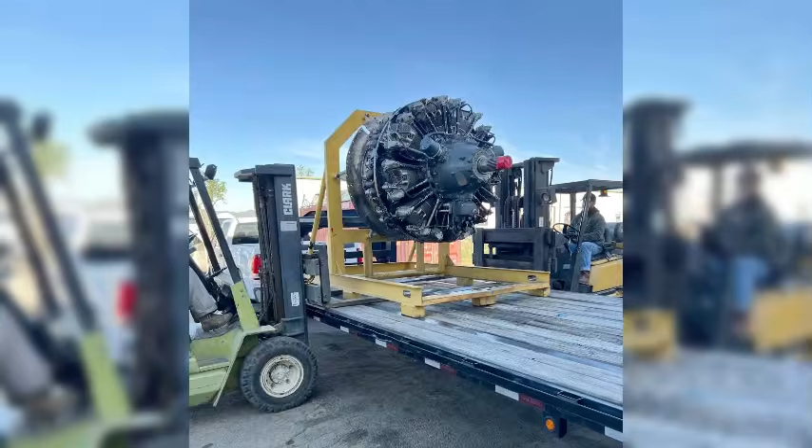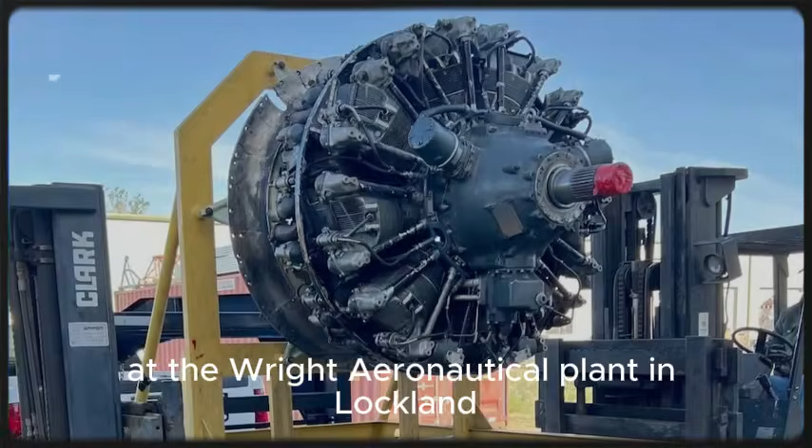The first thing you noticed was the heat. Not the Ohio summer heat, though that was bad enough. August in Cincinnati could press 95 degrees against your skin like a wet hand. No, this was different. This was the heat coming off an engine that had just been run for 6 minutes on a dynamometer stand at the Wright Aeronautical plant in Lockland, Ohio, and had to be shut down because the rear row of cylinders was glowing cherry red.

Not metaphorically, literally cherry red, the color of a horseshoe fresh from the forge, visible in the dim light of the test cell, even through the haze of burned oil smoke that hung in the air like a warning. The date was sometime in the late summer of 1942. The engineer standing closest to the test cell door, close enough to feel the radiant heat on his forearms, was watching the temperature gauges wind down and doing arithmetic in his head that no one in the room wanted to hear.

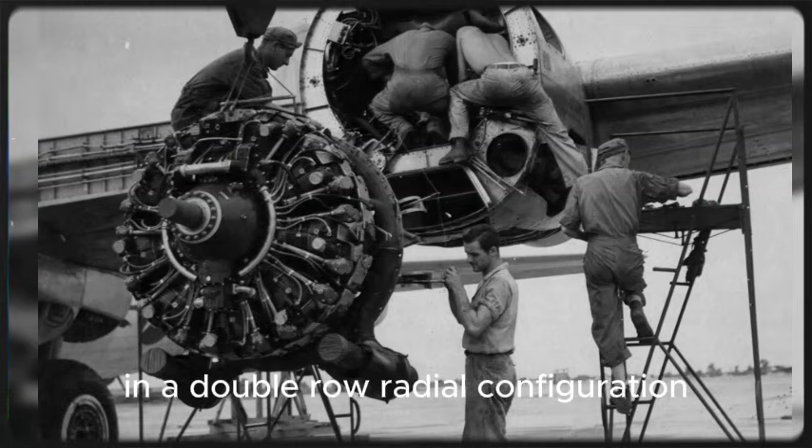The Wright R-3350 Duplex-Cyclone, the engine that was supposed to power the most important bomber in American history, had just demonstrated for the 14th or 15th time that it could not cool itself. The rear 9 cylinders, tucked behind the front 9 in a double-row radial configuration, were starving for air. They ran hot, they burned oil, they cracked exhaust valves, and when they failed, not if, when, they sprayed magnesium and aluminum fragments into the nacelle where they met fuel vapor and became fire.

The B-29 Superfortress existed on paper. Boeing had the airframe. The Army Air Forces had the contract. General Hap Arnold had staked his career and arguably the outcome of the Pacific War on a bomber that could fly higher than 30,000 feet, carry 10,000 pounds of bombs, and reach Tokyo from bases that hadn't been captured yet.

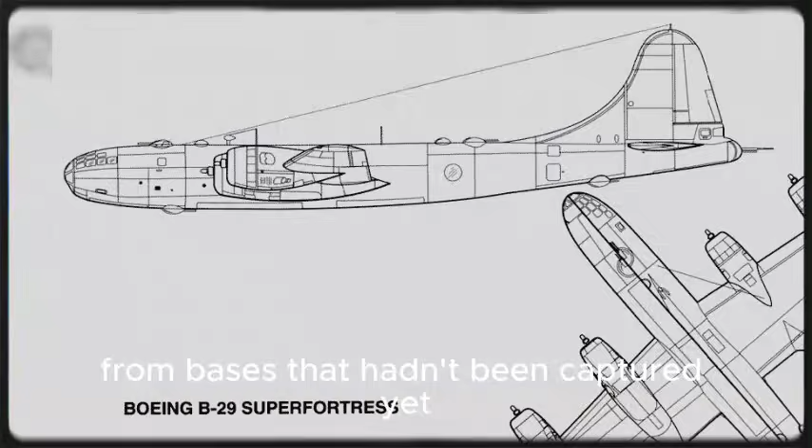Everything about the airplane was radical. Pressurized crew compartments, remote-controlled gun turrets, a central fire control computer, tricycle landing gear. It was, by any honest measure, the most technologically ambitious aircraft program of the Second World War. And it had no engine.

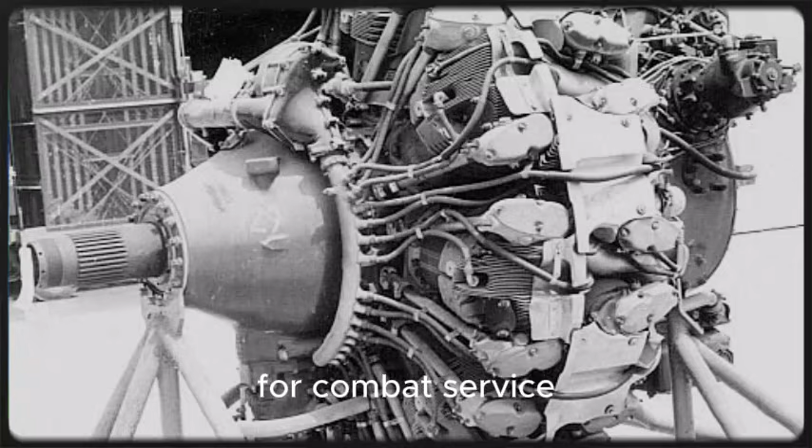That is not quite true, and the distinction matters. It had an engine on paper. It had an engine on the dynamometer. It had an engine that could produce 2,200 horsepower for brief, spectacular intervals before something inside it broke, melted, seized, or caught fire. What it did not have was an engine that could do this reliably for 500 hours, the minimum the Army demanded before it would accept a power plant for combat service. In mid-1942, the R-3350 could barely manage 50.

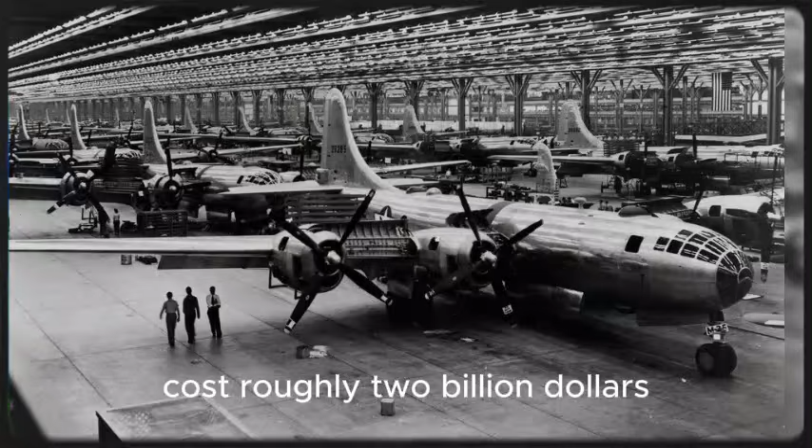The gap between those two numbers, 50 hours and 500, was not an engineering inconvenience. It was a chasm into which men, money, time, and eventually lives would be poured in quantities that make the Manhattan Project look, by comparison, like a tidy operation. The atomic bomb program cost roughly $2 billion. The B-29 program cost $3 billion.

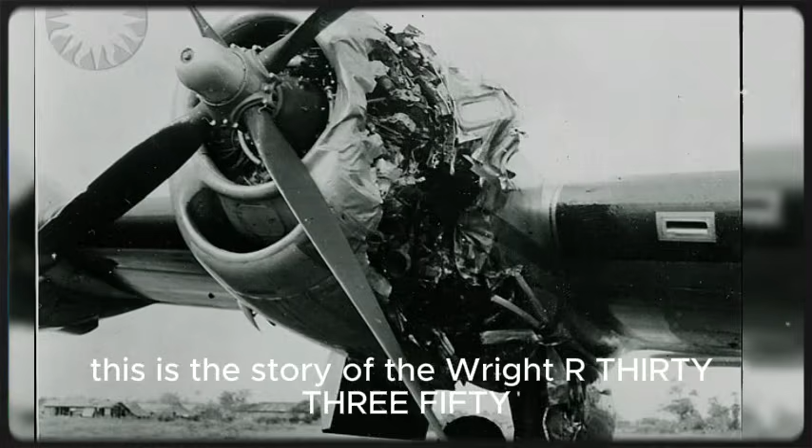And the single largest reason for that cost, the single most persistent source of delay, disaster, and death, was the engine that sat 2 to a wing on every Superfortress that rolled off the line in Wichita, Omaha, Marietta, and Renton. This is the story of the Wright R-3350, the engine that was asked to do something no aircraft engine had ever done, and that kept killing people while it learned how.

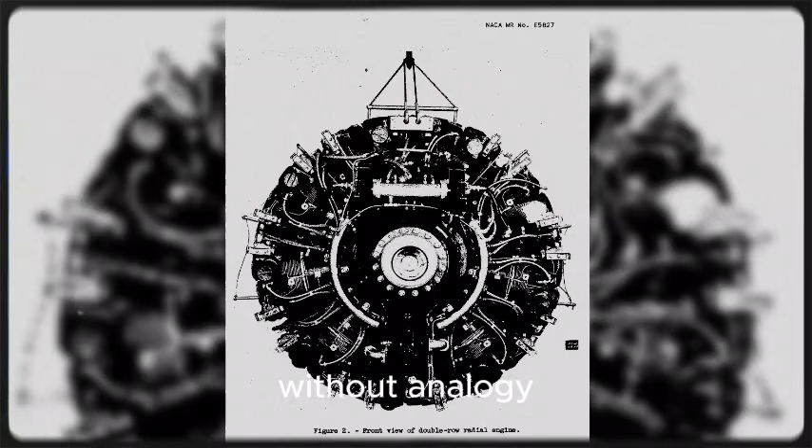The problem was thermodynamics, and thermodynamics does not negotiate. An 18-cylinder radial engine producing over 2,000 horsepower generates heat in quantities that are difficult to grasp without analogy. Each cylinder of the R-3350 displaced approximately 186 cubic inches, roughly the size of a 3-liter soda bottle, and roughly the same displacement as the entire engine in a modern compact car.

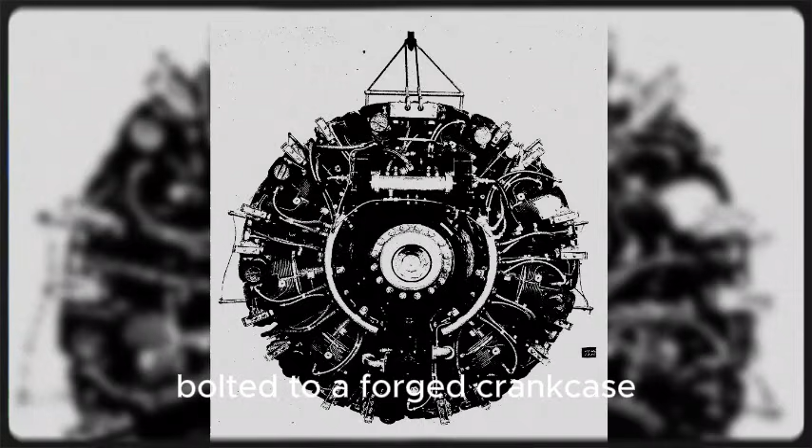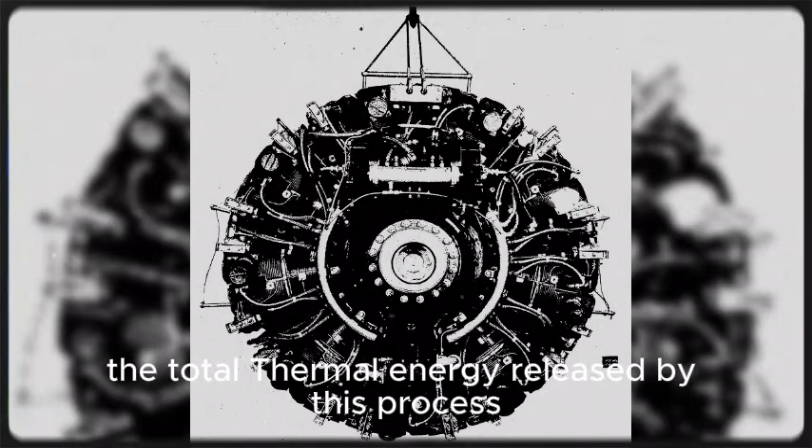There were 18 of them, arranged in 2 rows of 9, bolted to a forged crankcase that weighed as much as a grown man. Total displacement? 3,347 cubic inches, or nearly 55 liters. At takeoff power, each cylinder was firing its spark plugs, compressing fuel-air mixture, and expelling superheated exhaust gases more than 15 times per second. The total thermal energy released by this process, if captured and converted perfectly, could have heated a small apartment building. But it could not be captured perfectly.

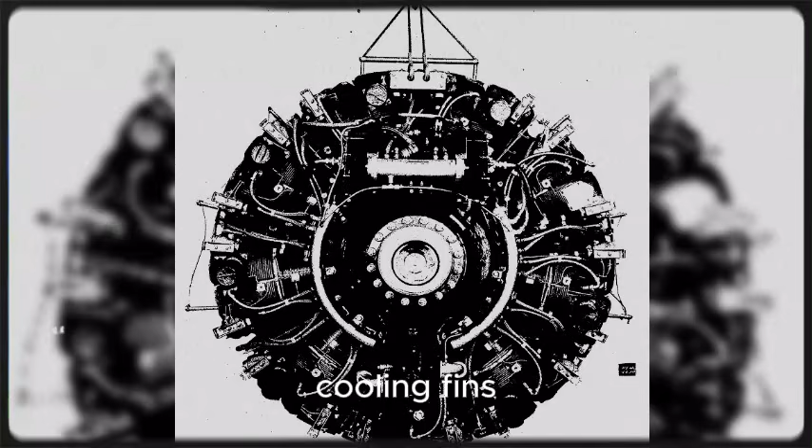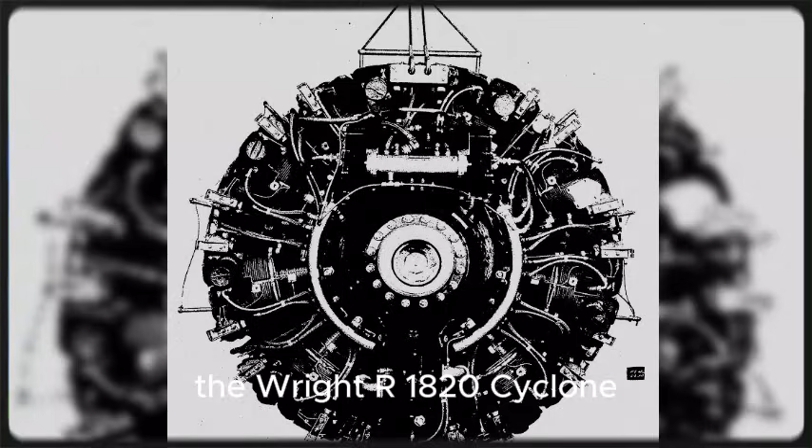That was the problem. In a single-row radial, the kind Wright had been building successfully since the late 1920s, each cylinder sat exposed to the oncoming airstream. Cooling fins machined into the cylinder heads and barrels transferred heat from the metal to the passing air, and the air carried it away. Simple. Effective. The Wright R-1820 Cyclone, a 9-cylinder single-row radial, was one of the most trusted engines of the 1930s. It powered the B-17 Flying Fortress. It ran cool, ran long, and almost never caught fire.

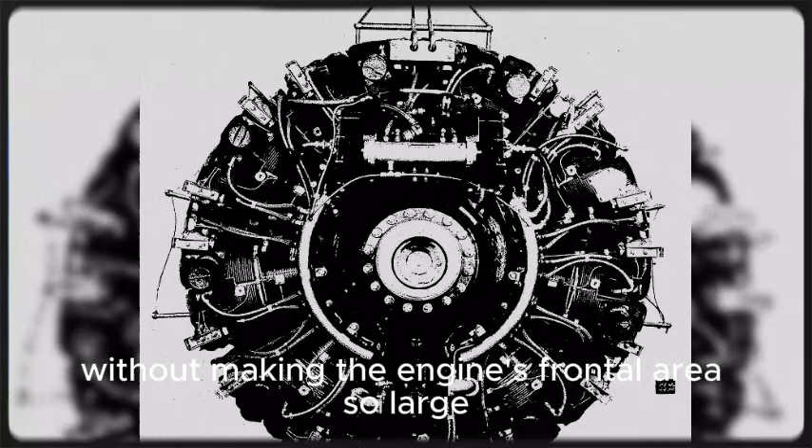The R-3350 was not a single-row radial. It was a double-row, 2 banks of 9 cylinders sharing a single crankshaft. The rear row staggered behind the front. This arrangement was necessary to achieve the displacement and power the B-29 required without making the engine's frontal area so large that it created unacceptable drag. A single row of 18 cylinders would have been absurdly wide. The cowling alone would have been the diameter of a small room. So the cylinders were stacked, front and back, in a compact package roughly 4 feet across.

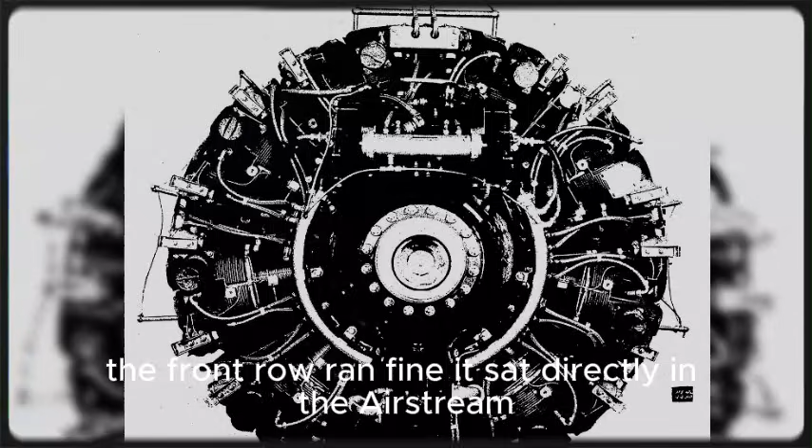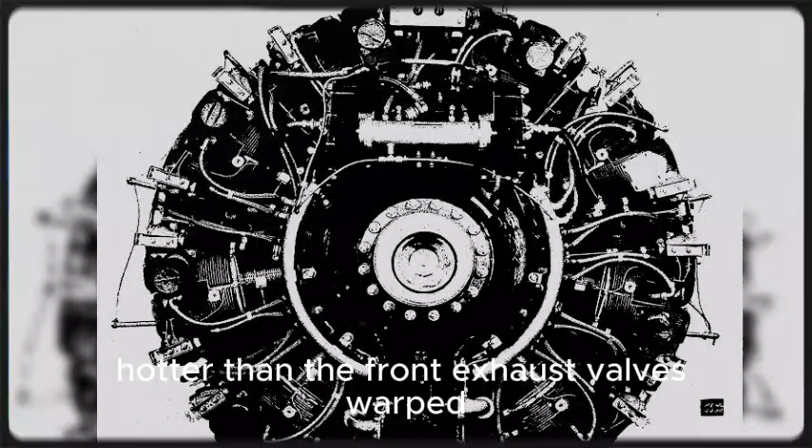The front row ran fine. It sat directly in the airstream, just as God and the laws of convective heat transfer intended. The rear row did not. It sat in the aerodynamic shadow of the front row, receiving only turbulent, preheated air that had already passed over 9 hot cylinders before reaching the 9 behind them. The temperature differential was staggering. On a tropical day at full power, the exact conditions the B-29 would encounter on every mission over Japan, the rear cylinders could run 150 degrees Fahrenheit hotter than the front. Exhaust valves warped, valve guides seized, cylinder heads cracked, oil carbonized in the valve train and turned to abrasive paste. And when a cylinder failed, the magnesium alloy crankcase, chosen for its light weight, became kindling.

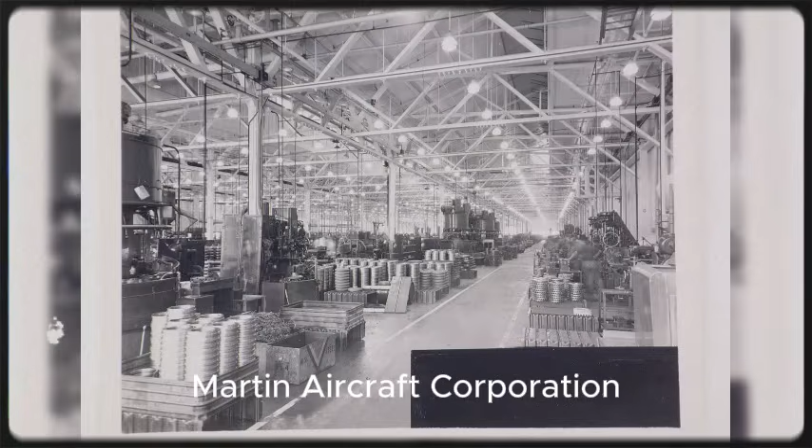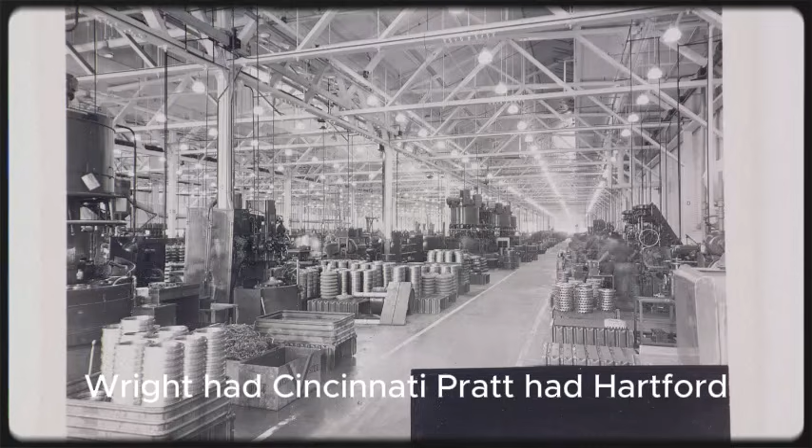Wright Aeronautical was not a company accustomed to failure. Founded in 1919 from the remains of the Wright-Martin Aircraft Corporation, itself a distant corporate descendant of the company Orville and Wilbur Wright had built, it had spent 2 decades establishing itself as one of America's 2 dominant aircraft engine manufacturers, the other being Pratt & Whitney. The rivalry between them was fierce, personal, and occasionally petty. Wright had Cincinnati. Pratt had Hartford. Wright had the Cyclone. Pratt had the Wasp. Each company believed, with the conviction of evangelical religion, that its design philosophy was superior.

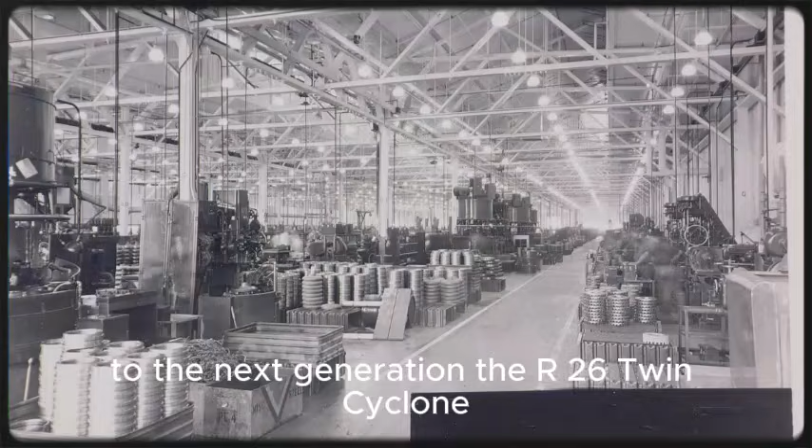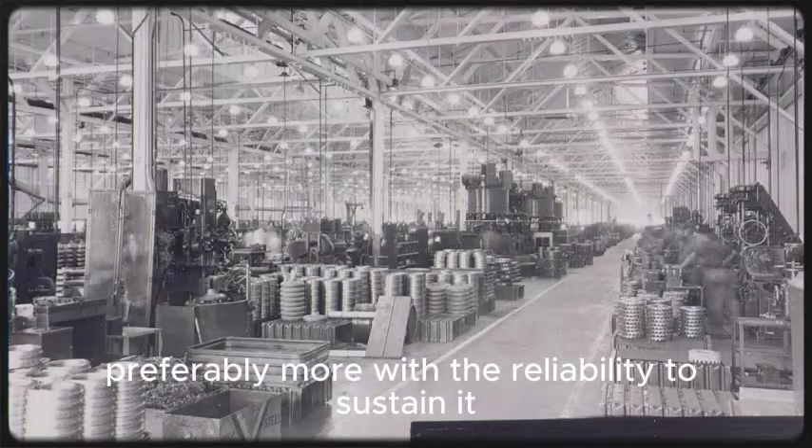Wright's philosophy was the radial air-cooled engine, and by the mid-1930s, the company was already looking ahead to the next generation. The R-2600 Twin Cyclone, a 14-cylinder double-row radial producing around 1,700 horsepower, entered development in 1935 and would go on to power the B-25 Mitchell, the TBF Avenger, and the A-20 Havoc, among others. It was a good engine. But the Army Air Corps wanted more. More power, more altitude, more range. The specification that would become the B-29 demanded an engine producing at least 2,000 horsepower, preferably more, with the reliability to sustain it at altitudes above 25,000 feet for missions lasting 16 hours. No such engine existed anywhere in the world in 1938, when Wright began serious design work on the R-3350.

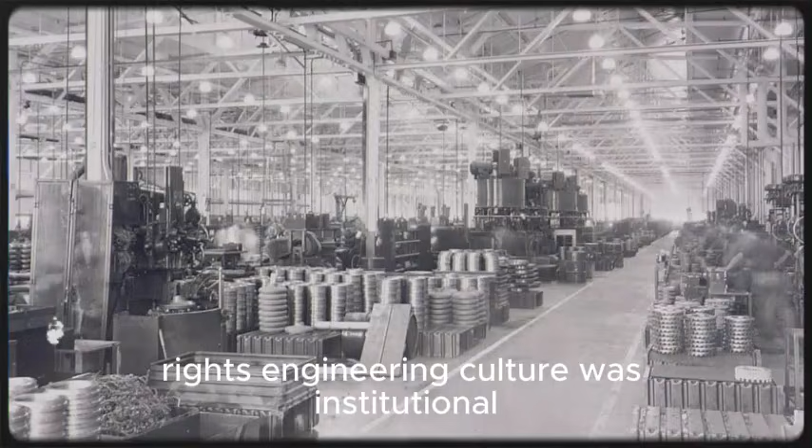The man most responsible for the engine's initial design was a Wright engineer named George J. Meade, though Meade's role in the company's engineering hierarchy makes precise attribution difficult. Wright's engineering culture was institutional rather than heroic. Decisions were made by committees, validated by test, and recorded in reports that named departments rather than individuals. This was not the kind of shop where a lone genius sketched a revolution on a napkin. It was the kind of shop where 40 men in short-sleeved shirts argued about cooling fin pitch for 3 weeks and then tested both options.

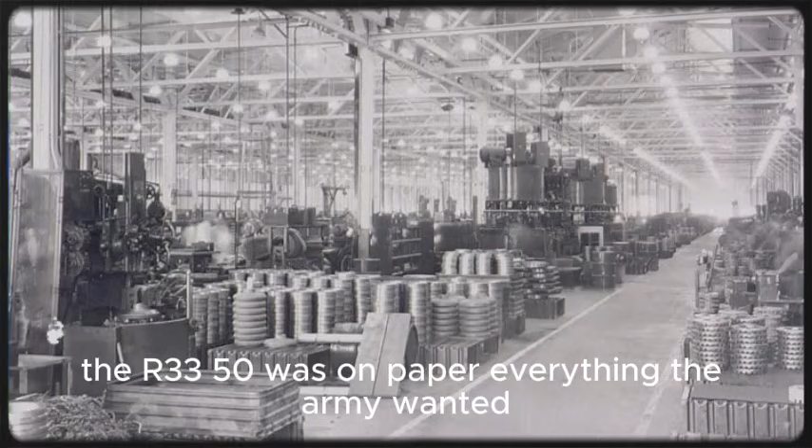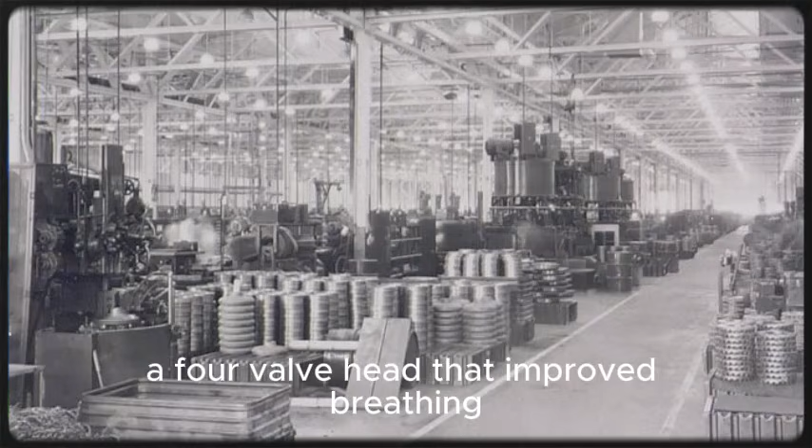What they designed, over the course of roughly 3 years, was an engine of breathtaking ambition and marginal practicality. The R-3350 was, on paper, everything the Army wanted. 18 cylinders, a 2-speed supercharger, forged steel connecting rods, a propeller reduction gear that could handle the torque of 2,200 horses without stripping its teeth. Each cylinder had 2 intake valves and 2 exhaust valves, a 4-valve head that improved breathing and should have improved cooling. The crankshaft was a masterpiece of metallurgy, a single forging that converted 18 separate combustion events per revolution into smooth rotational power. The engine first ran on a test stand in 1941. It made power. It also made trouble. Then came Pearl Harbor, and trouble became catastrophe.

The Japanese attack in December 1941 did not create the need for the B-29. Boeing had been working on the design since 1939, but it transformed the program from an ambitious development project into an existential priority. The Pacific Ocean was vast. The distances involved were unlike anything the European theater demanded. From any base the United States could reasonably hope to capture or build, Tokyo was more than 1,500 miles away. No existing American bomber could make that trip with a useful bomb load and return. The B-17 could not do it. The B-24 could not do it. The B-29 was the only airplane in development that even theoretically could.

General Henry Hap Arnold understood this with a clarity that bordered on obsession. Arnold was the commanding general of the Army Air Forces, and he believed, with a faith that was religious in intensity, that strategic bombing could win the war against Japan without the catastrophic ground invasion that military planners were already dreading. But strategic bombing required bombers, and bombers required engines, and the engine required for this particular bomber did not yet work. Arnold's response was to do something that violated every principle of orderly military procurement.

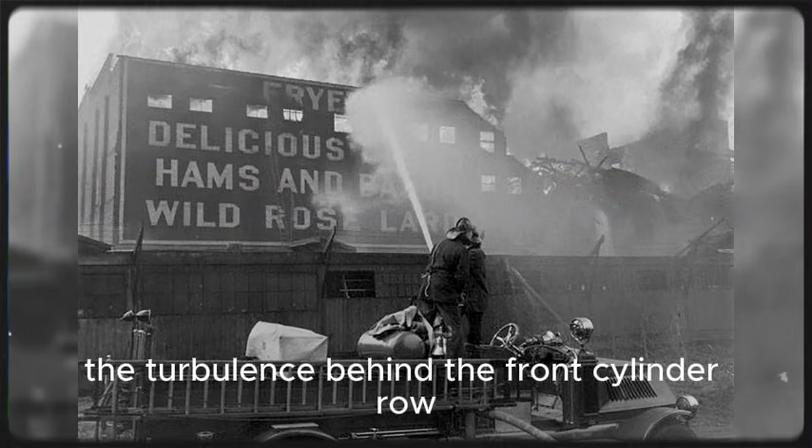The fixes came slowly, painfully, and accompanied by funerals. The core cooling problem, those starving rear cylinders, was attacked from multiple angles. Wright redesigned the cylinder baffling, the sheet metal guides that directed cooling air around each cylinder. The original baffles had been designed using wind tunnel data and theoretical airflow calculations. They were wrong. The turbulence behind the front cylinder row was worse than the models predicted, and the baffles did not force enough air over the rear cylinder fins. New baffles were designed, tested, redesigned, tested again. Each iteration required new tooling, new manufacturing procedures, and weeks of dynamometer testing.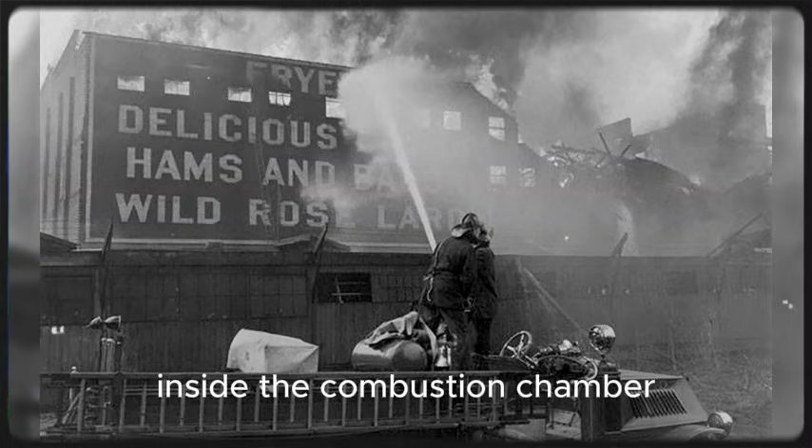The exhaust valves were another nightmare. Made from a cobalt alloy called stellite, they were supposed to withstand the temperatures and corrosive environment inside the combustion chamber. They didn't, at least not at the temperatures the rear cylinders were reaching. The valves warped, losing their seal against the valve seat. Hot exhaust gases blew past the damaged seal, eroding the valve further in a vicious feedback loop that ended with valve failure, cylinder failure, and often fire.

Wright experimented with sodium-cooled exhaust valves, hollow valves partially filled with metallic sodium which melted at operating temperature and sloshed back and forth, transferring heat from the valve head to the stem where it could be conducted into the cylinder head and carried away by cooling air. The concept worked. The execution was tricky. If the valve cracked, molten sodium met moisture, and the chemistry was unkind.

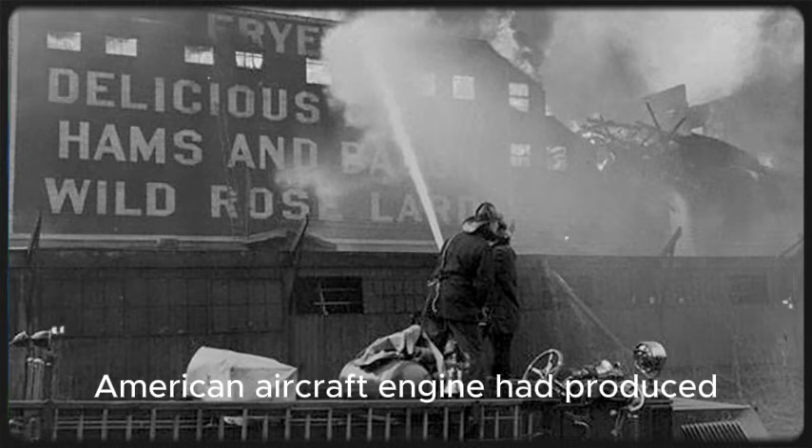Propeller reduction gear failures added another dimension of anxiety. The gear train that reduced crankshaft speed to propeller speed, necessary because a propeller blade tip moving faster than the speed of sound loses efficiency catastrophically, was transmitting more torque than any previous American aircraft engine had produced. Gear teeth chipped, bearings failed. Oil starvation at altitude, where the lubricant thickened in the cold, caused gears to run dry and weld themselves together in a shower of metal fragments that sounded, to the flight engineers sitting behind the cockpit, like a bag of hammers thrown into a washing machine.

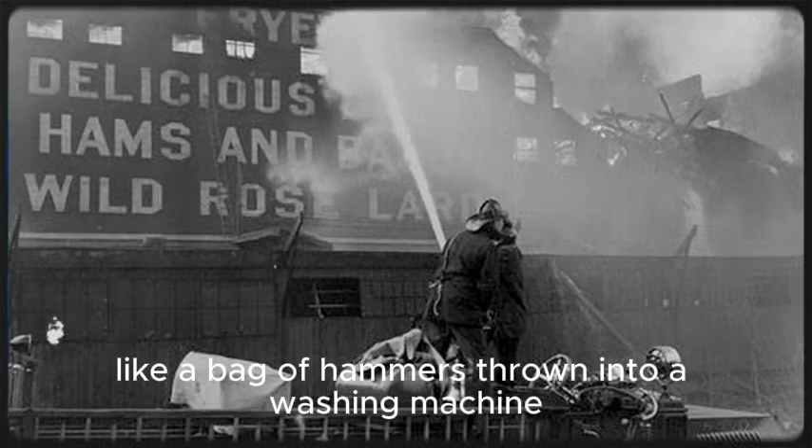The human cost of these failures was not abstract. On February 18, 1943, a B-29 prototype, the second XB-29 built, serial number 41003, took off from Boeing Field in Seattle for a routine test flight.

The legendary test pilot Eddie Allen was at the controls. Allen was one of the most experienced test pilots in America, a man whose calm under pressure was the stuff of industry legend. 11 minutes after takeoff, the number 1 engine caught fire. Allen reported the fire and turned back toward Boeing Field.

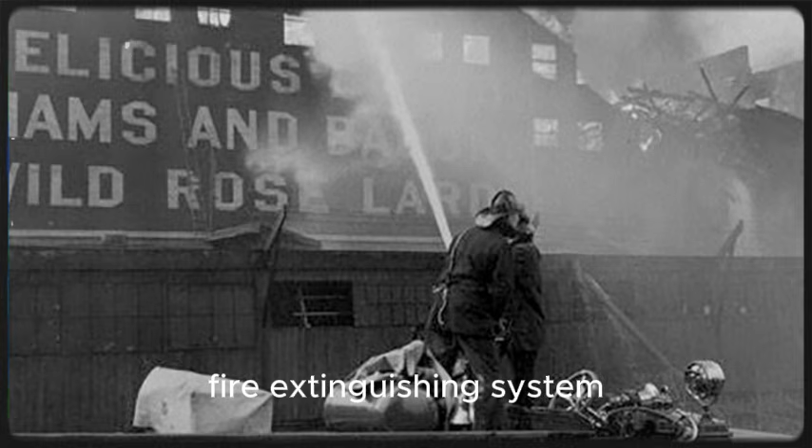The fire spread to the wing. The airplane crashed into the Frye meatpacking plant near the airfield, killing all 11 crew members aboard the aircraft and roughly 20 workers in the building below. The investigation pointed to the engine, specifically to an engine fire that exceeded the capacity of the nacelle fire extinguishing system and burned through the wing spar.

The tragedy was compounded by the fact that this was not a surprise. Engine fires had been reported repeatedly during ground testing and early flight testing. The R-3350 was known within the engineering community as a fire hazard. Allen's death and the deaths of the men with him were, in the coldest possible analysis, predictable.

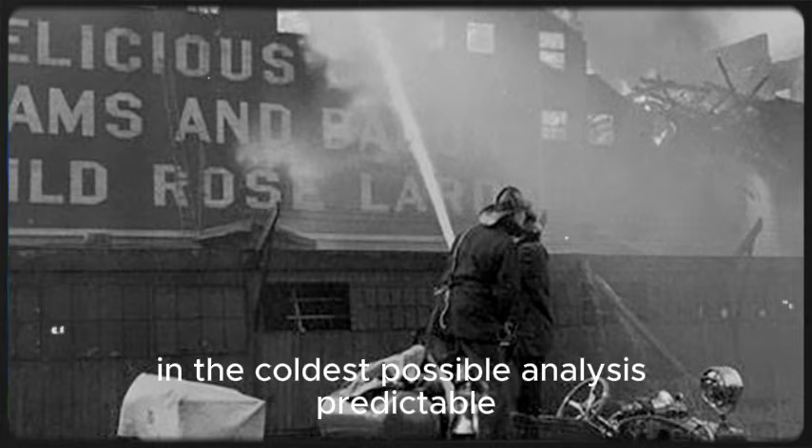Senator Harry Truman's War Investigating Committee, the same committee that had made Truman a national figure by exposing waste and incompetence in defense production, launched an inquiry. Wright Aeronautical was scrutinized, Boeing was scrutinized, the Army Air Forces was scrutinized. The fundamental question was blunt. Why was a $3 billion airplane program being built around an engine that kept catching fire?

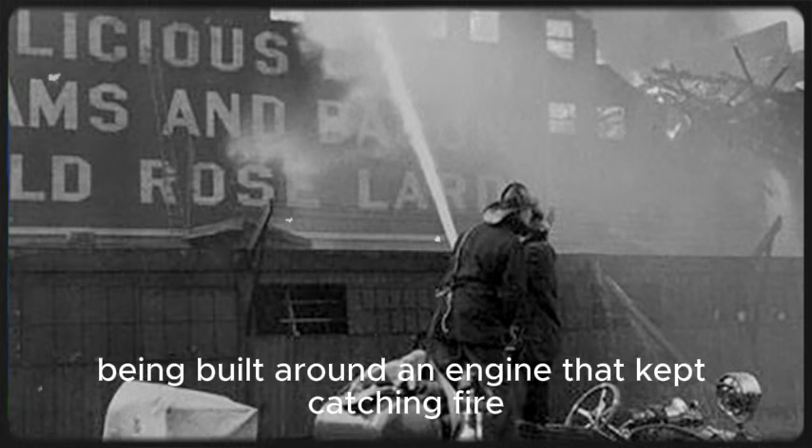The answer, which satisfied no one, was that there was no alternative. No other American engine of sufficient power existed. Pratt & Whitney's R-4360 Wasp Major, a 28-cylinder 4-row radial that would eventually produce over 3,500 horsepower, was even further from readiness. Going back to a smaller engine meant a smaller airplane, shorter range, lower altitude, fewer bombs, and the loss of everything the B-29 was supposed to accomplish.

Arnold's gamble was not a gamble because he liked risk. It was a gamble because the alternative was no gamble at all, just surrender of the strategic bombing mission against Japan. So they kept building the engine, and they kept fixing it, and men kept dying in the process.

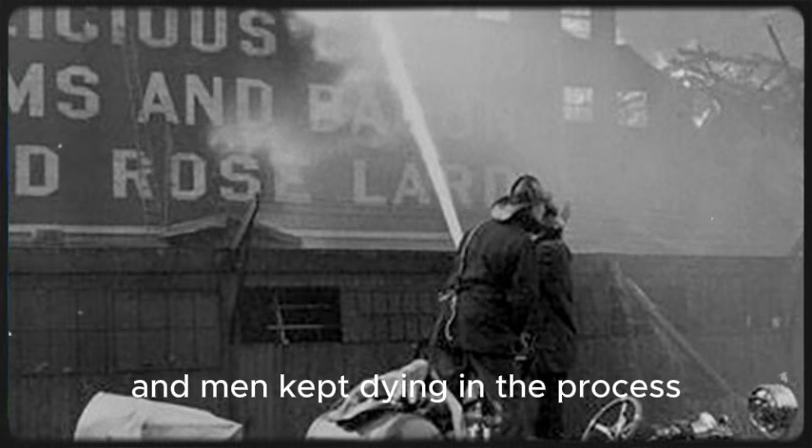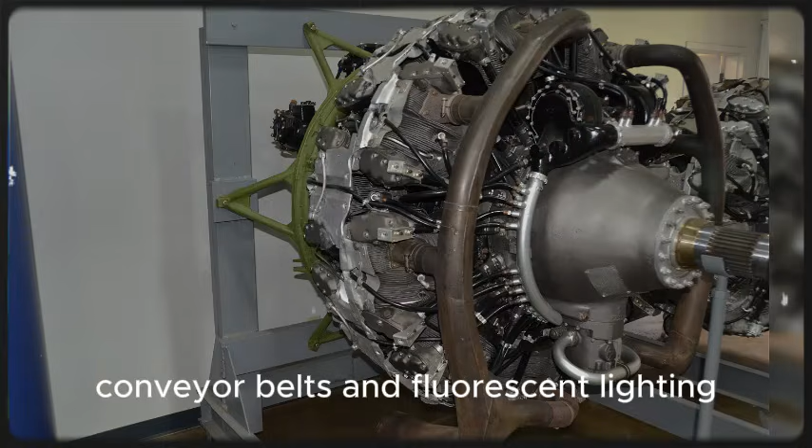By mid-1943, the factory floor at Lockland consumed a person whole. The main assembly building stretched more than a quarter mile in one direction, and the noise inside it was a physical thing, not just loud, but layered, a geological strata of sound. The bottom layer was the constant industrial hum of ventilation, conveyor belts, and fluorescent lighting. Above that, the staccato percussion of rivet guns, the whine of milling machines cutting aluminum, the sharp crack of torque wrenches.

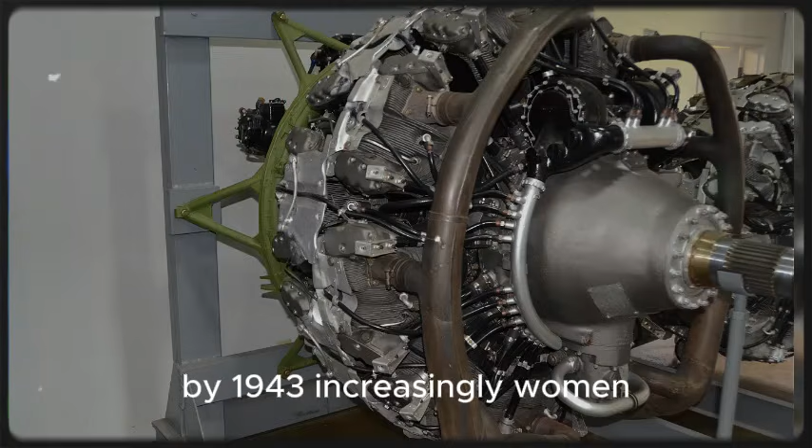And above it all, from the test cells at the far end of the building, the unmistakable full-throated bellow of an R-3350 at takeoff power, a sound that vibrated in the chest cavity and made conversation impossible within 200 feet. The workers who built these engines were, by 1943, increasingly women. The narrative of Rosie the Riveter is well known, perhaps too well known. It has been smoothed into a feel-good story of empowerment when the reality was more complicated and more interesting.

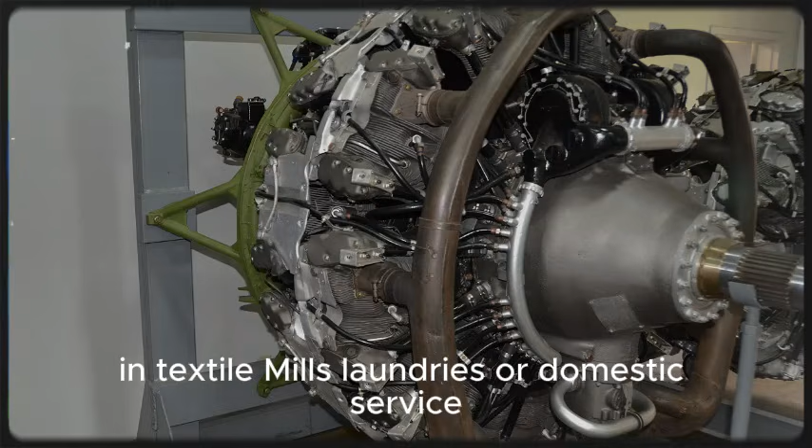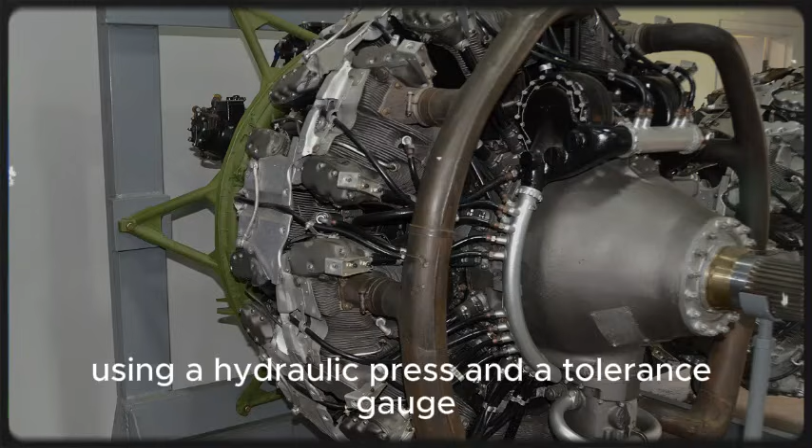Many of the women at Lockland had worked before the war in textile mills, laundries, or domestic service. Some had never held a tool heavier than a kitchen knife. They were trained in weeks to perform operations that peacetime apprenticeships would have stretched across years. A woman assembling exhaust valve guides, a task requiring the insertion of a precise metallic sleeve into a cylinder head bore using a hydraulic press and a tolerance gauge, was performing work that directly determined whether a cylinder would overheat and fail over Kobe or Nagoya.

The quality control pressure was enormous. Every engine was tested before delivery. Every engine that failed its test, and many did, was torn down, inspected, repaired, and tested again. Rejected engines piled up in a holding area that workers called the graveyard, rows of disassembled power plants on wooden pallets, their crankcase halves spread open like mechanical autopsies.

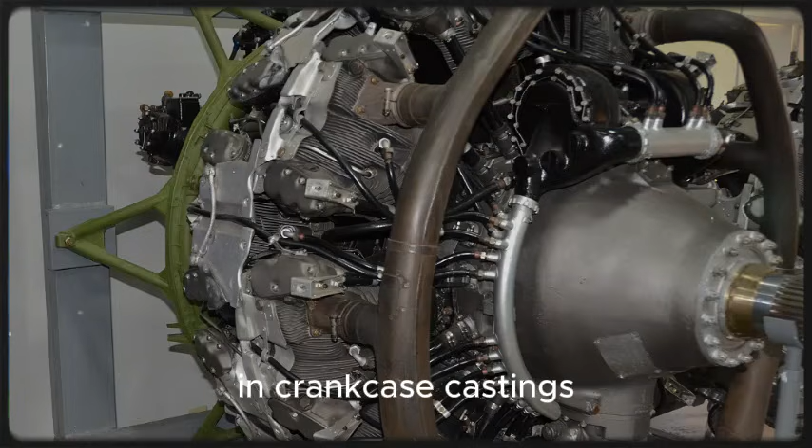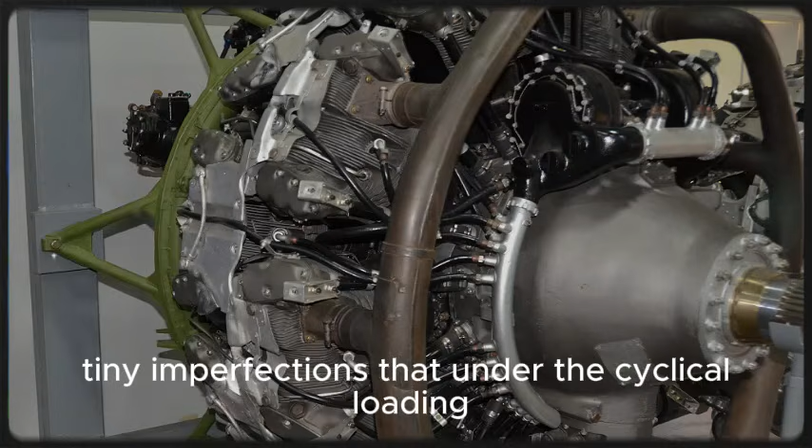The defect rate in 1943 was alarming. Wright's own internal reports documented problems with porosity in crankcase castings, improperly heat-treated connecting rods, and cylinder barrels with machining marks that acted as stress risers, tiny imperfections that, under the cyclical loading of thousands of combustion events per minute, would nucleate cracks and propagate failures.

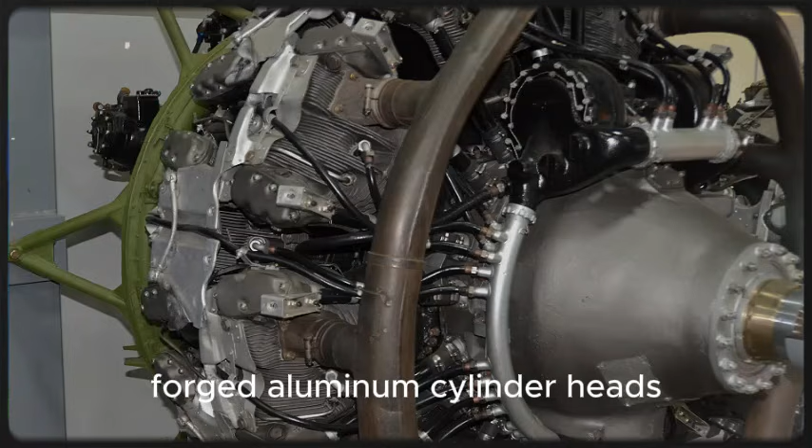At the Dodge Chicago plant, the problems were different but no less severe. Chrysler's engineers were supremely competent at mass production. They knew flow, they knew tooling, they knew how to move material through a factory with ruthless efficiency. What they did not know was aircraft engine metallurgy. The alloys used in the R-3350, forged aluminum cylinder heads, nitrided steel cylinder barrels, silver-lead bearings, behaved differently from the cast iron and mild steel that Detroit knew intimately.

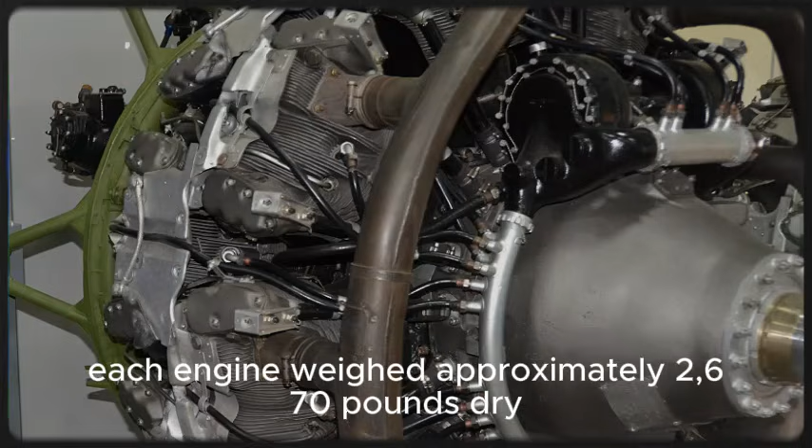Chrysler had to learn on the job, and the tuition was paid in scrapped parts and failed engines. Production ramped up regardless. By late 1943, Wright and Dodge combined were producing hundreds of R-3350s per month. By early 1944, the number exceeded 1,000. Each engine weighed approximately 2,670 pounds dry, over 1.25 tons of precision-machined metal that had to function flawlessly in conditions ranging from tropical sea-level heat to the -60-degree cold of the stratosphere.

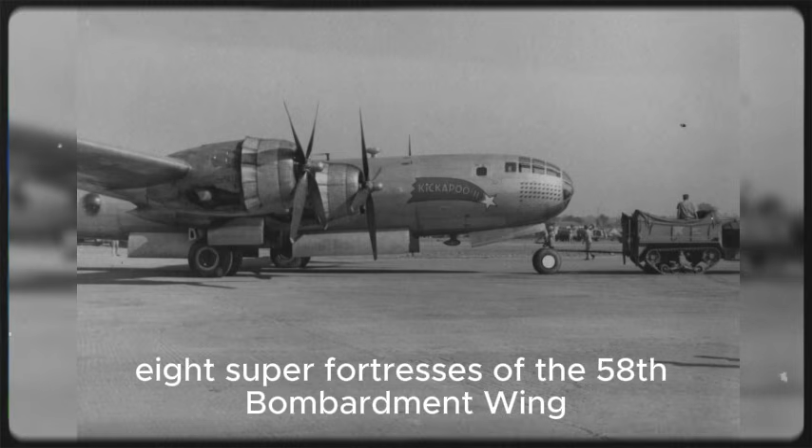The engine went to war before it was ready, because the war would not wait. The first B-29 combat mission launched on June 5, 1944, the day before D-Day, though the coincidence was unintentional. 98 Superfortresses of the 58th Bombardment Wing took off from bases around Kharagpur, India, bound for the Makasan Railroad Yards in Bangkok, Thailand. The mission was a logistical compromise. Bangkok was within range of India, while Japan was not, and its purpose was as much operational training as strategic bombing. The results were not encouraging.

Of the 98 aircraft that launched, only 77 reached the target area. 14 aborted with mechanical problems, the majority of them engine-related. 5 aircraft were lost, none to enemy action, all to mechanical failures or operational accidents. The bomb damage to the railroad yards was negligible. The R-3350's behavior in the field confirmed what the test engineers had feared.

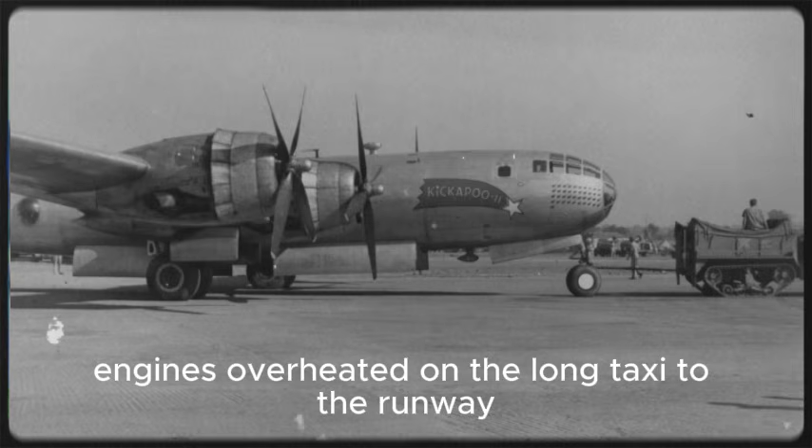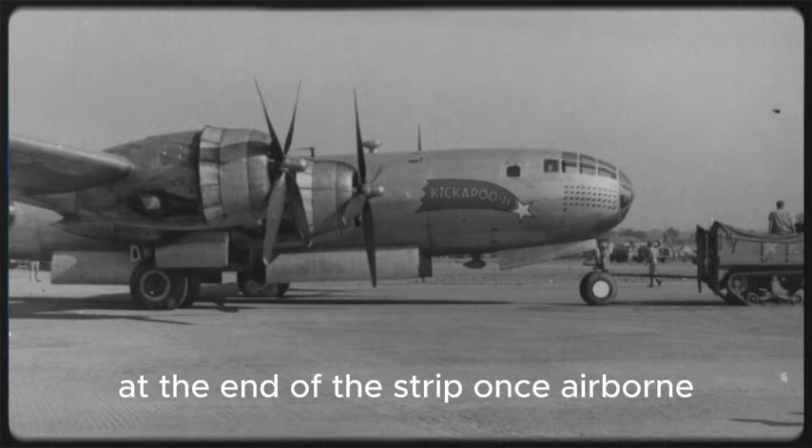Engines overheated on the long taxi to the runway, a process that could take 30 or 40 minutes on the crowded Indian airfields. Cylinder head temperatures climbed past redline during the extended high-power takeoff roll, and pilots who throttled back to save their engines risked not clearing the obstacles at the end of the strip. Once airborne, engines that had been abused during takeoff would occasionally seize, swallow a valve, or simply catch fire with a suddenness that left the flight engineer no time to react.

Sergeant Henry "Red" Erwin's story would come later, over Koriyama, Japan in April 1945, but it captures something essential about what it meant to fly behind these engines. Erwin was a radio operator, not a mechanic, but every man on a B-29 crew understood the engines intimately because their lives depended on them. The pre-flight ritual included a careful inspection of each nacelle for oil leaks, a check of the cowl flap actuators, and a silent prayer, spoken or unspoken, that today would not be the day the No. 3 engine decided to eat itself.

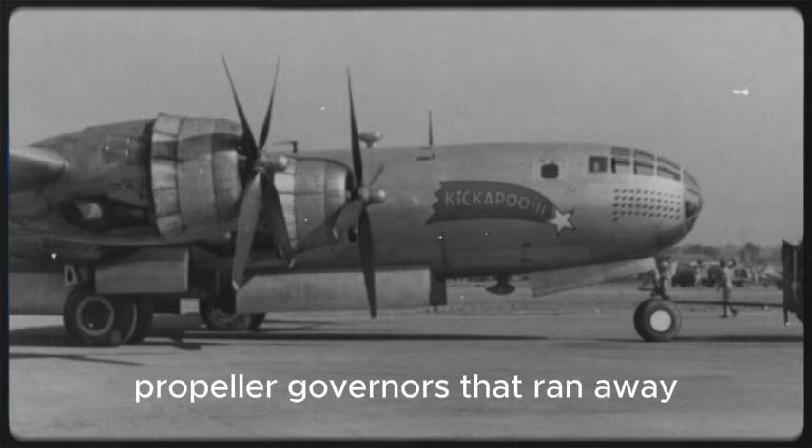Staff Sergeant Jack Spratt, a flight engineer with the 462nd Bombardment Group, kept an informal log of engine failures during the group's first 6 months of operations from India. His list, preserved in a memoir published decades later, is a catalog of mechanical mayhem. Cracked cylinders, thrown rods, burned pistons, failed magnetos, oil leaks that emptied a 35-gallon tank in 20 minutes, propeller governors that ran away and sent engine RPM screaming past redline before the engineer could reach the feathering button.

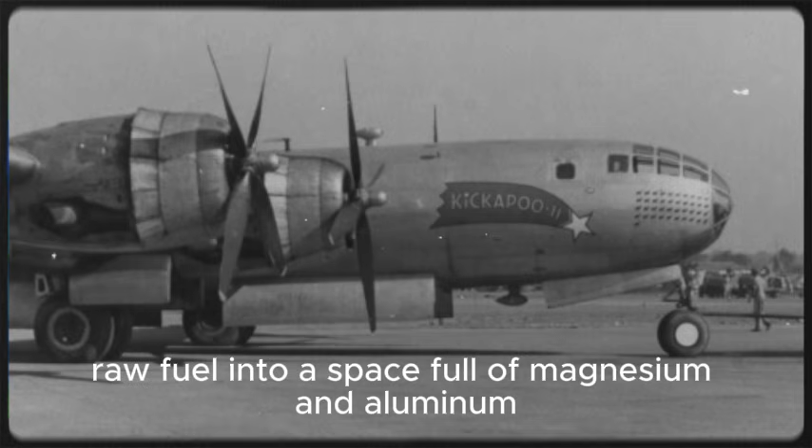Spratt noted that his airplane went through 11 engines in 4 months. Not the same engine repaired 11 times. 11 different engines, removed and replaced because they had failed or were about to. The fire problem was the worst. The R-3350's exhaust system ran close to the nacelle structure, and any engine failure that involved a cracked cylinder or a broken exhaust stack could spray burning oil and raw fuel into a space full of magnesium and aluminum.

The nacelle fire extinguisher system, a bottle of carbon dioxide that could be discharged into the engine compartment with the pull of a handle, was frequently inadequate. A fire that was not extinguished within seconds could burn through the main wing spar in less than 2 minutes. When the spar failed, the wing folded. There was no surviving that.

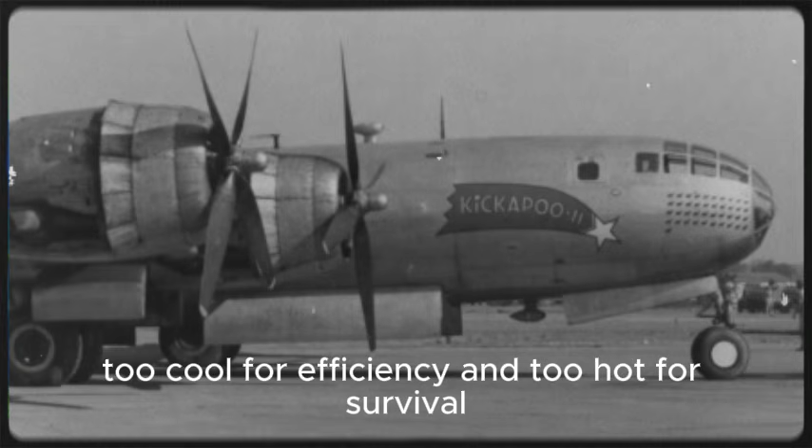The crews developed their own countermeasures, born of desperation and ingenuity. Some flight engineers ran the cowl flaps wider than the manual specified, accepting the drag penalty in exchange for lower cylinder head temperatures. Others nursed the throttles with a finesse that would have impressed a concert pianist, making tiny adjustments constantly to keep temperatures in the narrow band between too cool for efficiency and too hot for survival. The best flight engineers could hear an engine change pitch before the gauges showed anything, a skill that was not taught so much as earned through survival.

What the Japanese had on the other side of this equation was almost nothing. Japan's aero engine industry in 1944 was producing capable engines, the Nakajima Homare, the Mitsubishi Kasei, but nothing in the class of the R-3350.

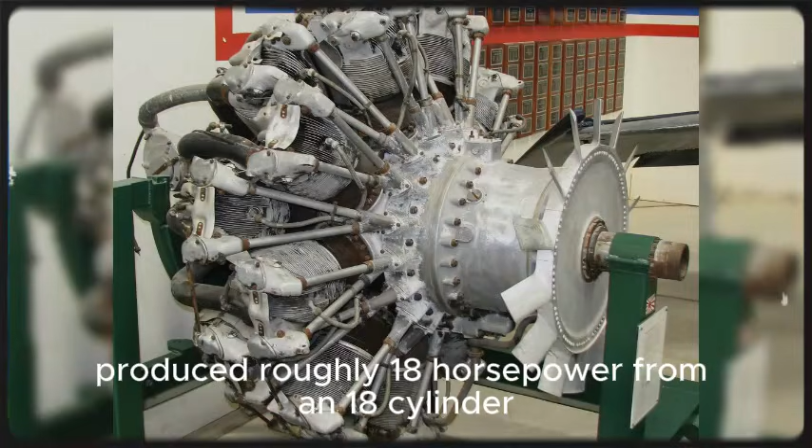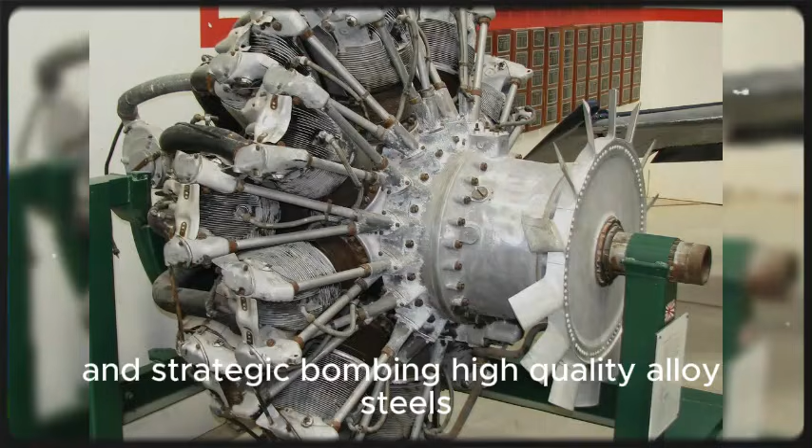The most powerful Japanese production engine, the Nakajima NK9 Homare, produced roughly 1,800 horsepower from an 18-cylinder double-row radial that suffered, ironically, from many of the same overheating problems as the R-3350, but without the industrial infrastructure to fix them. Japan's metallurgical base was shrinking under the pressure of submarine blockade and strategic bombing. High-quality alloy steels, the kind needed for exhaust valves and crankshafts, were becoming scarce. Cylinder production was plagued by porosity defects that Japanese quality control, less systematic than its American counterpart, sometimes failed to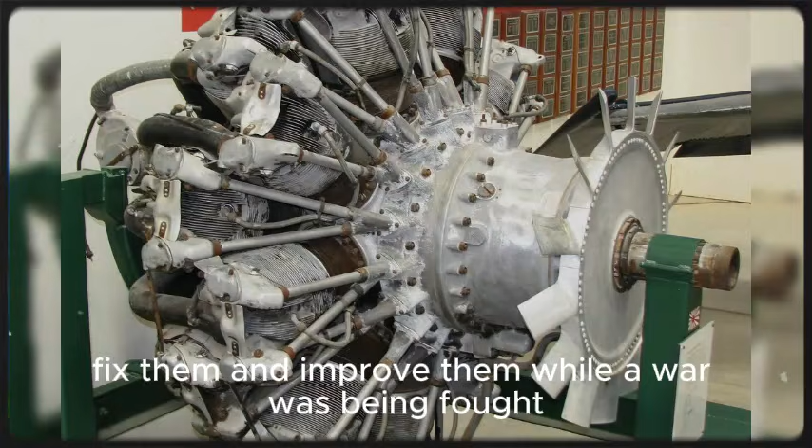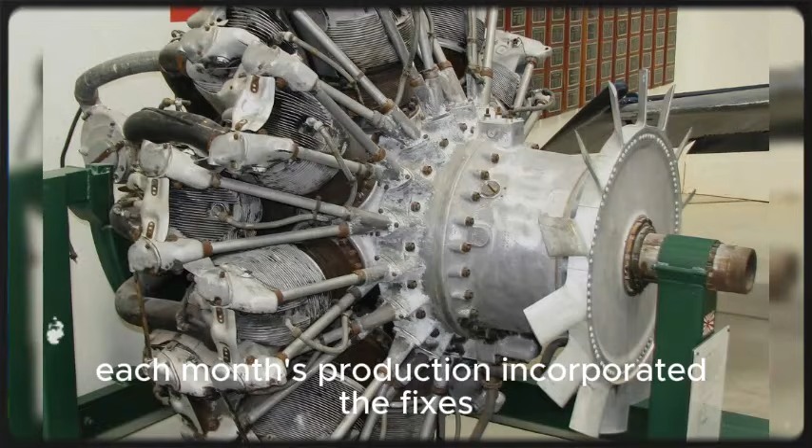catch. The asymmetry was not just in the engines, it was in the capacity to produce them, fix them, and improve them while a war was being fought. The United States could afford, in the material and moral sense, to send an imperfect engine into combat because it had the industrial depth to keep modifying it until it worked. Each month's production incorporated the fixes learned from the previous month's failures. New baffle designs, improved exhaust valves, better oil formulations, revised maintenance procedures. The R-3350 of January 1945 was a substantially different engine from the R-3350 of January 1944, even though the type designation was the same. Japan could not do this.

Its engine factories were being bombed by B-29s running those same troubled engines, and its supply chains were being severed by submarine warfare. An engine defect discovered in the field could not be corrected at the factory because the factory might no longer exist or might lack the raw materials to implement the fix. The Japanese pilot flying a Kawanishi N1K Shiden with a problematic Homare engine had no expectation that next month's engine would be better. The American pilot flying a B-29 with a problematic R-3350 could at least hope.

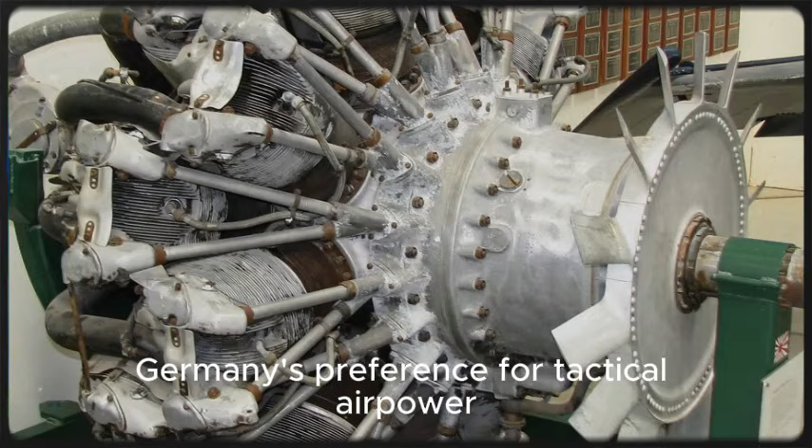Germany, for its part, had taken an entirely different path. The Luftwaffe's heavy bomber program had been effectively abandoned by 1942, a strategic decision that reflected Germany's preference for tactical air power and its inability to sustain multiple enormously expensive development programs simultaneously. Germany had no equivalent of the B-29 and no equivalent of the R-3350. The closest comparison, the BMW 801, a 14-cylinder double-row radial producing around 1,700 horsepower, was a fine engine, but it was designed for fighters and medium bombers, not for the kind of high-altitude, long-range strategic mission that defined the Superfortress.

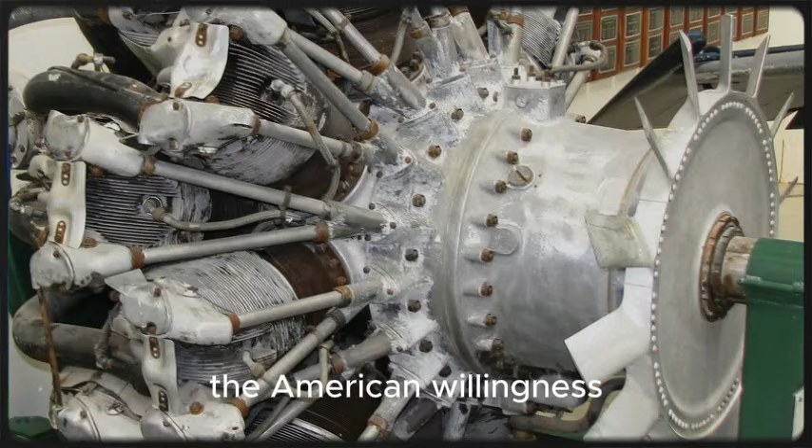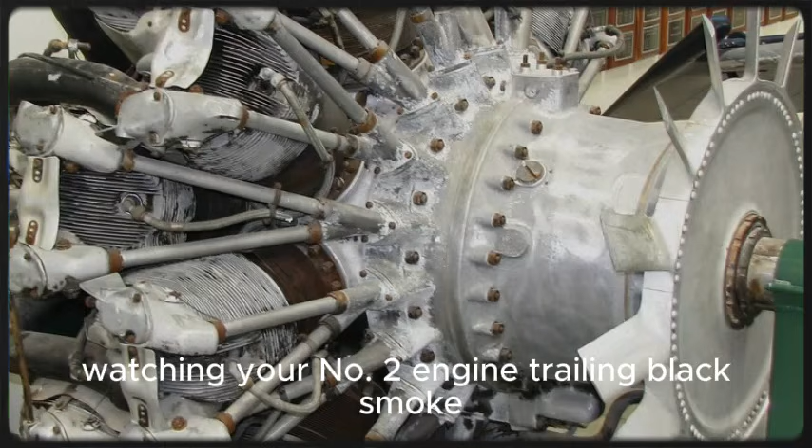The American willingness to tolerate an imperfect engine, to mass-produce it while still debugging it, to accept casualties in the development process and press forward, this was not, strictly speaking, an engineering triumph. It was an industrial and organizational philosophy, a bet that volume and iteration would solve problems that perfection before production never could. Whether it was admirable or reckless depends on where you stood. If you stood in a factory in Lockland, it felt like progress. If you stood in the cockpit of a B-29 over Osaka watching your No. 2 engine trailing black smoke, it felt like something else.

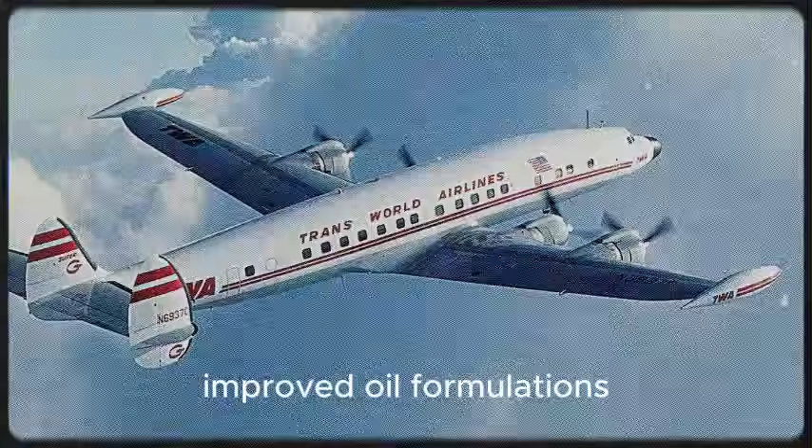The engine grew up. That is perhaps the most surprising part of the story. By mid-1945, the R-3350 was no longer the catastrophe it had been 18 months earlier. The improvements were cumulative and real. Redesigned cylinder baffles improved rear-row cooling by roughly 40 degrees Fahrenheit. Not enough to eliminate the problem, but enough to push it below the threshold of routine failure. New exhaust valve materials and sodium cooling reduced valve failures to manageable levels. Improved oil formulations resisted carbonization at high temperatures. Revised propeller reduction gears, manufactured to tighter tolerances and better heat-treated, stopped eating themselves.

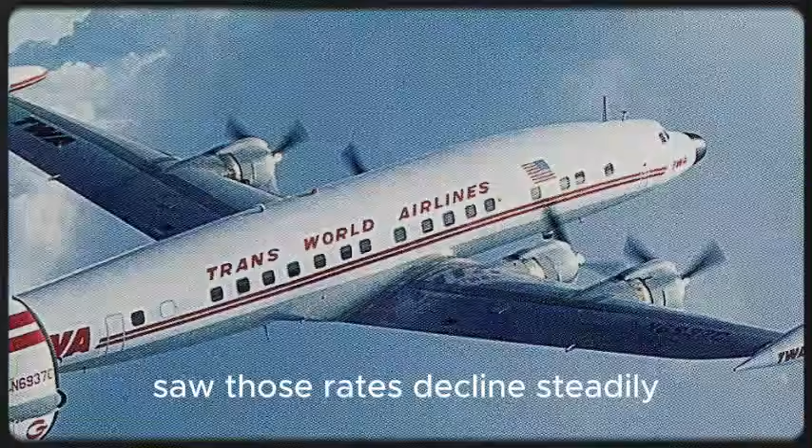The fire problem was never fully solved during the war, but it was mitigated. Better nacelle drainage, improved firewall seals, and larger fire extinguisher bottles gave crews a fighting chance against engine fires that would have been fatal a year earlier. The XX Bomber Command, operating from China and India, had suffered engine-related losses that were, per sortie, worse than combat losses. The XXI Bomber Command, operating from the Marianas beginning in late 1944, saw those rates decline steadily as improved engines and better maintenance procedures reached the field.

When General Curtis LeMay made his controversial decision in March 1945 to switch from high-altitude daylight precision bombing to low-altitude nighttime incendiary raids, one of the underappreciated consequences was a dramatic reduction in engine stress. Flying at 5,000 to 9,000 feet instead of 25,000 to 30,000 feet meant lower manifold pressures, lower cylinder head temperatures, and less strain on the supercharger. The engines lasted longer, the fires decreased. The R-3350 at low altitude was, if not reliable, then at least survivable.

After the war ended, the engine found a second career. The post-war era of commercial aviation, the period between 1945 and the coming of the jets, was the age of the large piston engine, and the R-3350 was its monarch.

Significantly redesigned and fitted with turbo-compound power recovery turbines, exhaust-driven turbines that fed power back into the crankshaft, extracting energy that would otherwise have been wasted as heat, the R-3350 became the engine of choice for the Lockheed Constellation and the Douglas DC-7, two of the most important airliners of the 1950s.

In this application, properly maintained by airline mechanics who were not being shot at, running at cruise power rather than emergency war power, the engine was finally what it had always been designed to be: powerful, efficient, and reasonably reliable. The turbo-compound version produced up to 3,700 horsepower, nearly 70% more than the wartime version, and its specific fuel consumption was among the lowest of any piston engine ever built.

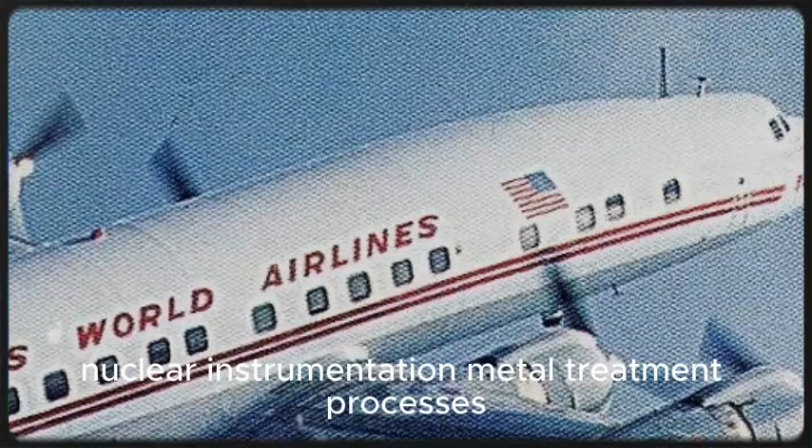Curtiss-Wright pivoted to other products, nuclear instrumentation, metal treatment processes, industrial valves, and exists today as a diversified industrial company based in Davidson, North Carolina, with annual revenues north of $2 billion. It does not make aircraft engines. The last R-3350 rolled off the production line sometime in the 1950s, and the factories where they were built have been repurposed or demolished.

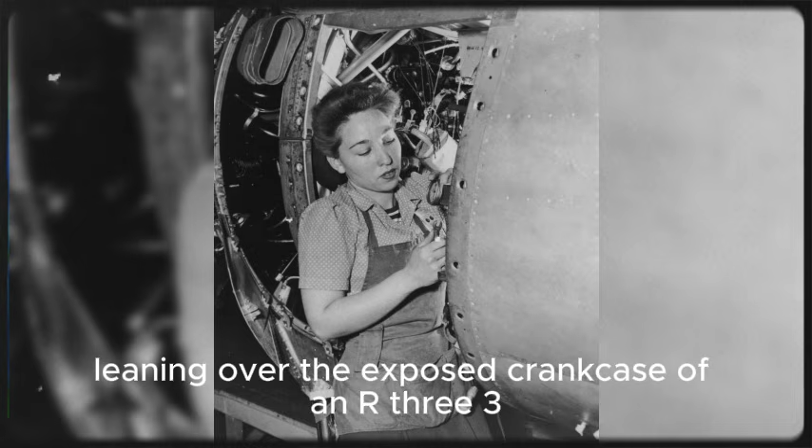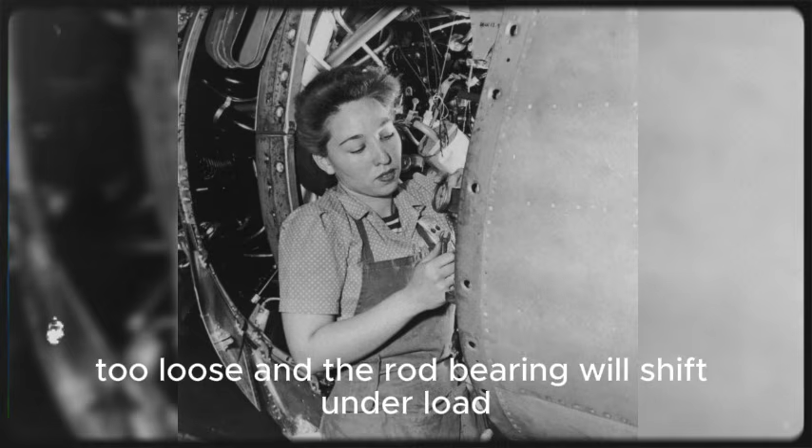Each bolt must be torqued to a precise specification. Too loose, and the rod bearing will shift under load. Too tight, and the bolt will stretch and fail in fatigue. The tolerance band is measured in foot-pounds, a unit of rotational force that she has learned to feel through the handle of the wrench in her palm. She has done this hundreds of times. She will do it hundreds more.

Each bolt she torques correctly is a tiny, incremental contribution to the possibility that an engine will hold together over Tokyo, that a bomber will return to Tinian, that a crew of 11 men will walk away from their airplane and eat dinner and write letters home. She does not know their names. She will never know their names.

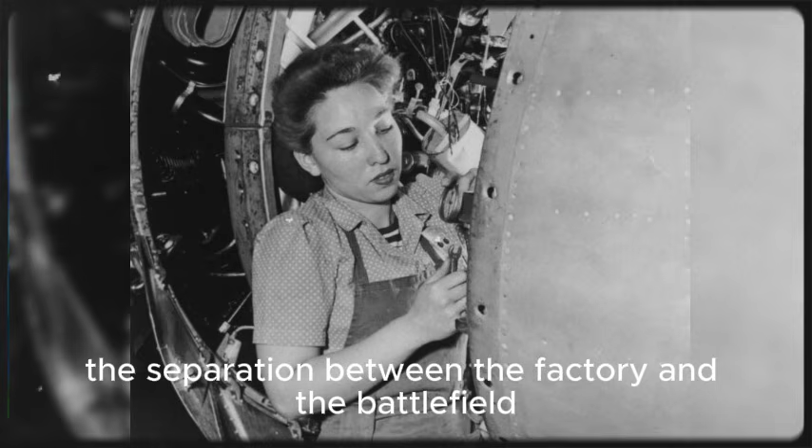The separation between the factory and the battlefield was total and deliberate. The women and men who built these engines had no contact with the crews who depended on them, no feedback loop of gratitude or blame. The engine was the intermediary, the mechanical proxy through which one American's labor became another American's survival or death.

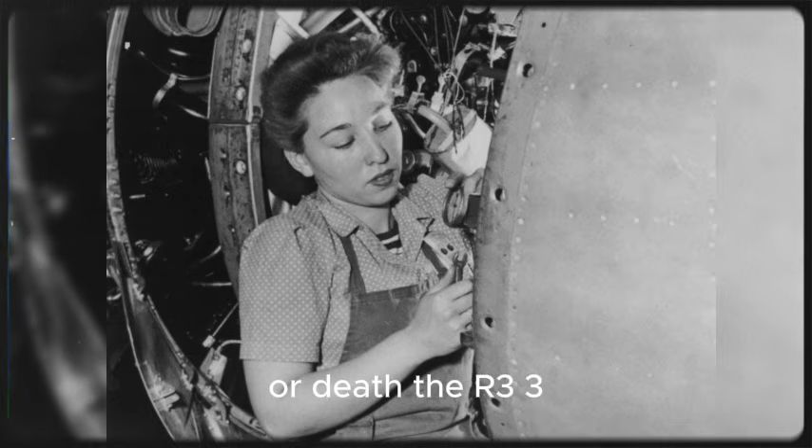The R-3350 was never a great engine in the way the Rolls-Royce Merlin was great, or the Pratt & Whitney R-2800 was great. Engines that arrived in the world more or less ready to do their jobs, and did them with a consistency that inspired genuine affection. The R-3350 was a difficult engine, a troubled engine, an engine that demanded more of its builders and its operators than any reasonable person would have asked. It caught fire, it killed test pilots, it failed at the worst possible moments.

It was rushed into production before it was ready, mass-produced by workers who had never built anything like it, and sent to war in an airplane that could not afford to fly without it. But it flew. It improved. It carried the war to Tokyo when nothing else in the American arsenal could reach that far.

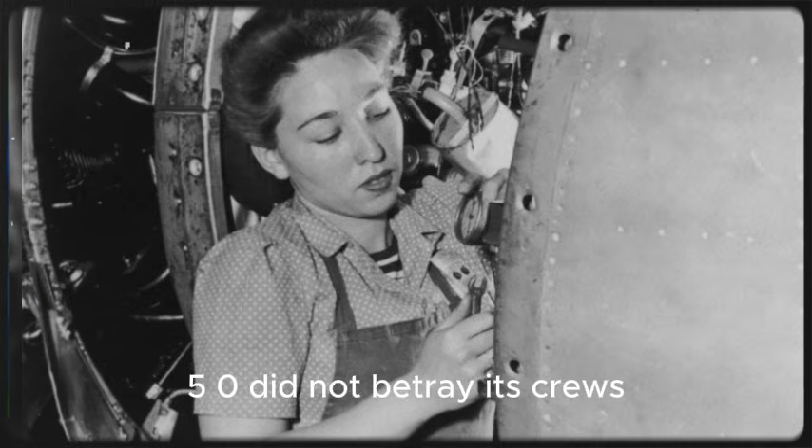And the people who built it, the engineers in Cincinnati, the machinists in Chicago, the women at Lockland with their torque wrenches and their safety glasses, did not have the luxury of waiting until the engine was perfect. They built what they could as fast as they could, and they fixed it while it fought. The R-3350 did not betray its crews. It struggled alongside them. And in the end, later than anyone wanted, at a cost higher than anyone planned, it did what it was built to do.